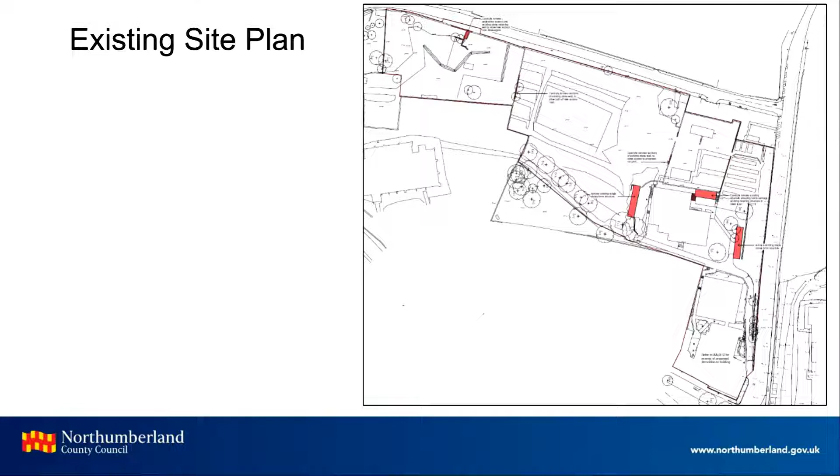To the east of this site is the castle, just to give members some orientation who perhaps aren't familiar with Alnwick itself.

The proposed site plan - important to note, this has already been approved under those previous references I mentioned. So the original permission to which this application relates is for the conversion of numbers 2 to 8 Bailiffgate to form 14 hotel suites/apartments, including a new restaurant and bar area.

It is proposed that this will be connected by a glazed link to a new build hotel block extension to the rear, providing a further 33 hotel rooms. This would equate to 47 in total.

The original permission stated that the existing windows would be retained, and this application seeks to vary this requirement to allow a full replacement of the original single glazed windows with double glazed timber frame slimline cylinder glass units. The modern section is proposed to install aluminium framed windows.

The issue here is whether it is appropriate to replace the existing single glazed windows in a Grade 2 star listed property. The window details on the new extension are acceptable.

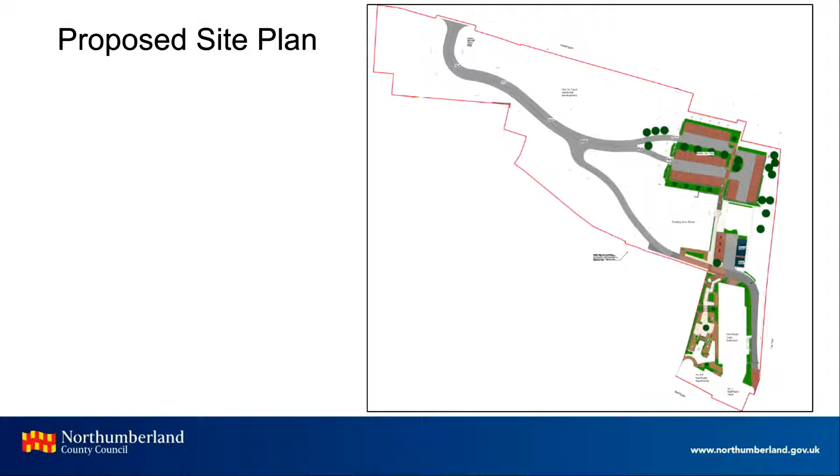So I now have a series of slides. These are the proposed elevations, and members may have seen these before, given they're the same bar the window detailing as previously approved.

So these are the proposed elevations on Bailiffgate. These are the Grade 2 star listed buildings sitting in a terrace. Originally, the applicant stated that the windows would be refurbished and retained. However, we are led to understand, and perhaps anecdotally, that some of the windows are suffering from rot. This does not demonstrate they're incapable of repair.

These doors you can see along the front there, the doors for each building, to be stripped and repaired. The windows you can see would be replaced with conservation-style double glazing. The applicant is proposing cylinder glass. These windows are thought to be the original windows which used crown glass.

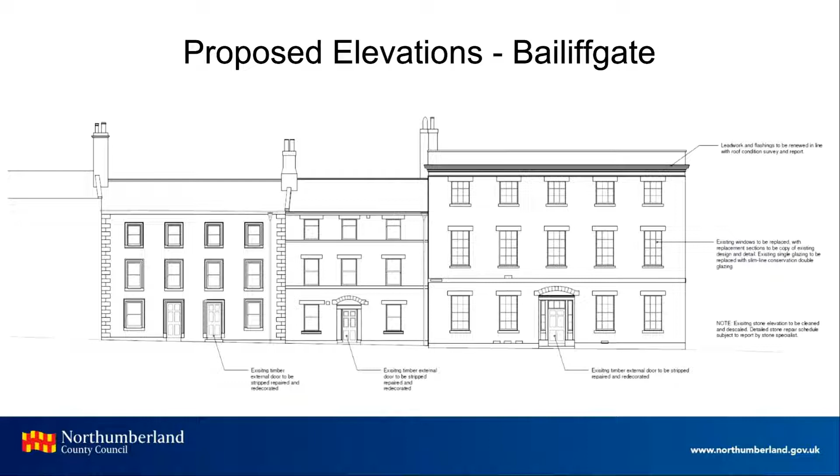So this shows the new build modern element. Materials are natural slate and zinc to the roofs with sandstone walls.

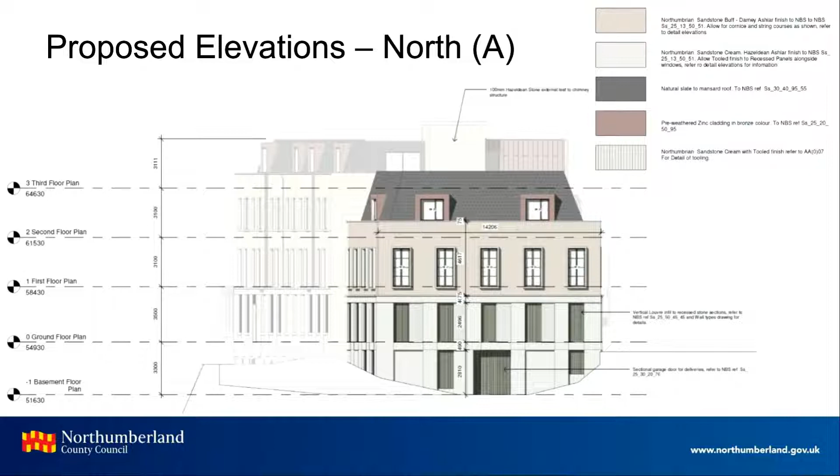This shows the rear of the listed buildings actually. So the greyed out elements, that's the back of the listed buildings. Details include repair and maintenance of stonework and replacement of windows.

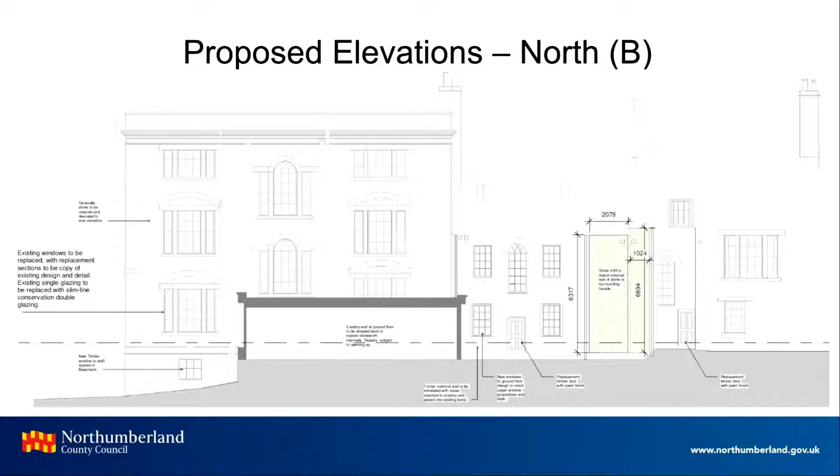This is to the east. As you would, to give further orientation, this would be standing on the pend. You can see the site, the levels slope down, the dark grey at the bottom of the screen slopes down. So you're standing on the pend and the castle would be to your rear. Again, you can see that the existing listed element, the building on the left, those windows would be replaced.

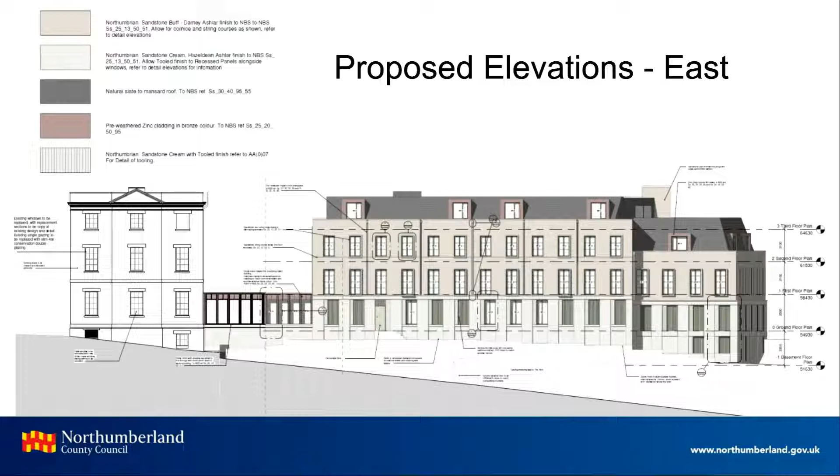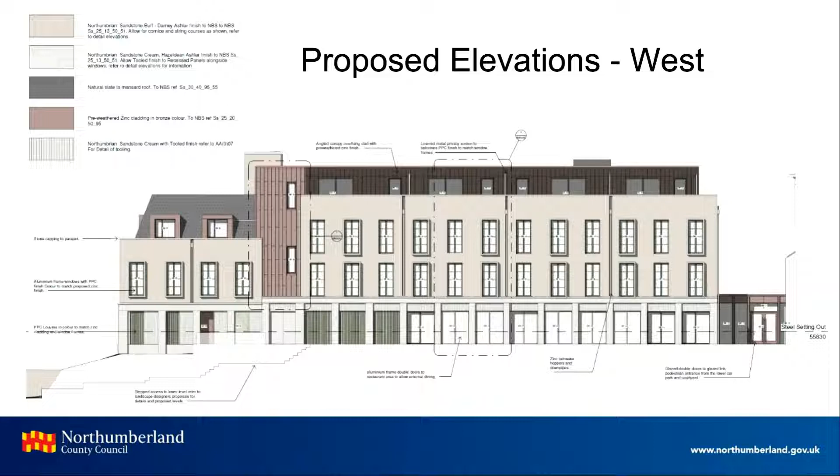In the first instance, applicants should demonstrate that the existing windows are beyond reasonable repair. Only thereafter can the planning authority proceed to consider replacement units.

The Council's Building Conservation team has commented that the proposals have the potential for less than substantial harm, as per the wording of the NPPF.

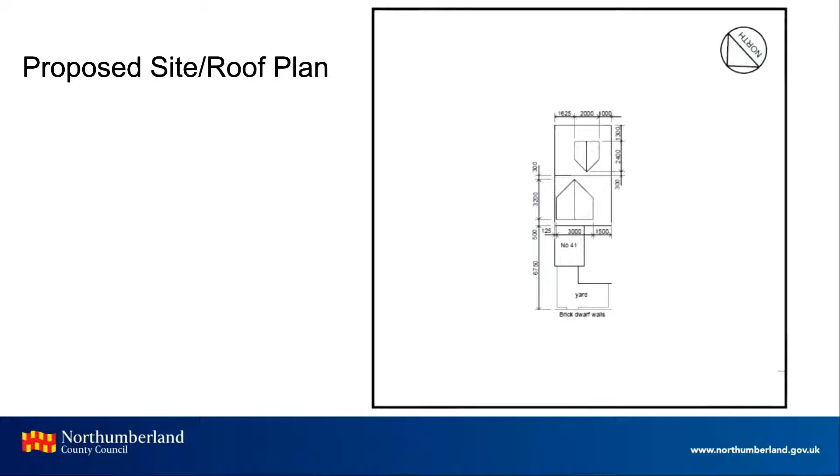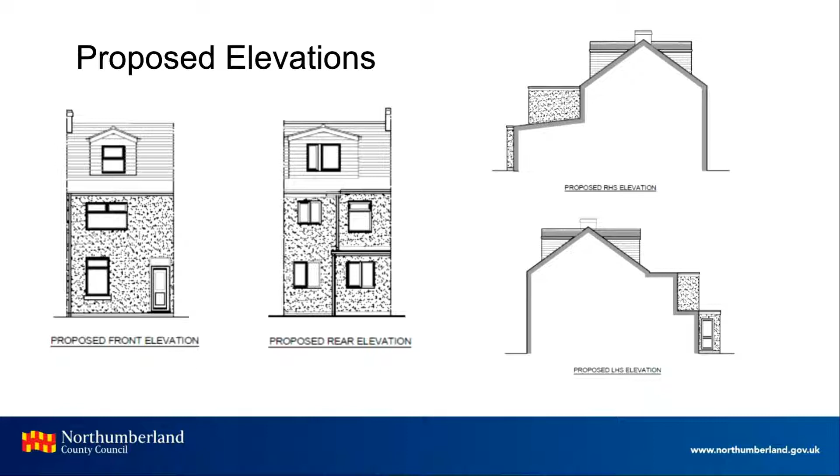The front dormer is smaller in nature, and whilst this type of dormer is not evident throughout the immediate area, there are examples of this dormer style within the conservation area. Here's the smaller proposed front dormer on the left, and on the right, the proposed rear elevation.

Mr Chairman, two objections have been raised regarding car parking and the impact on the character and appearance of the dwelling. The officer has assessed these issues and considers there will be no direct impact on car parking, and the impact on the host dwelling is acceptable in planning terms, certainly in scale, design and finish. The recommendation is for approval, subject to conditions set out in the report.

Thank you. We have no speakers from the public, so we'll move straight on to questions to the officers from members. Do we have any questions for the officers?

Councillor Watson: Just to clarify, that street, George Street, has no dormers at the moment, has it? I know the street, I know it hasn't, and your photograph shows it hasn't as well. I just wanted to point that out. And I'll say the rest later.

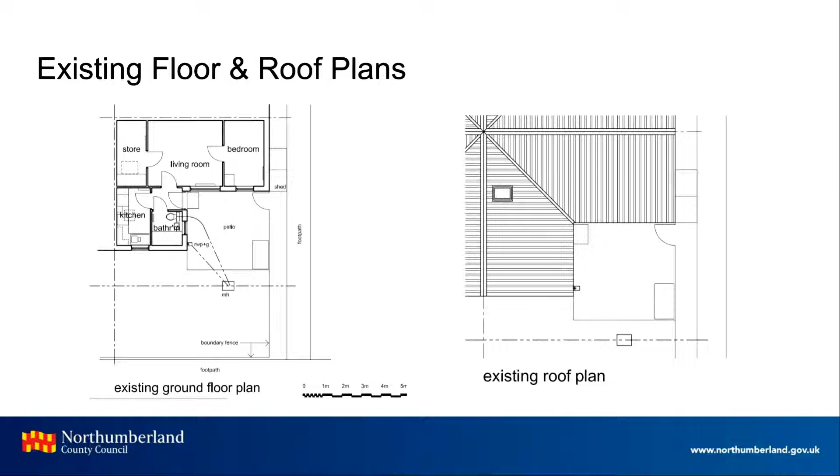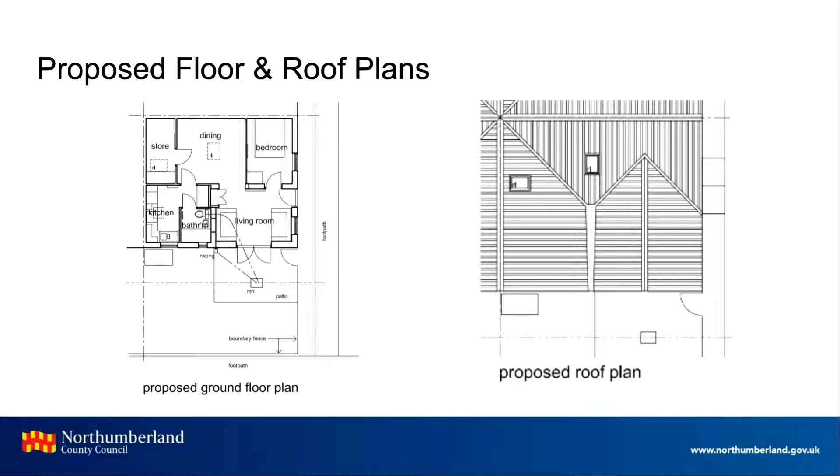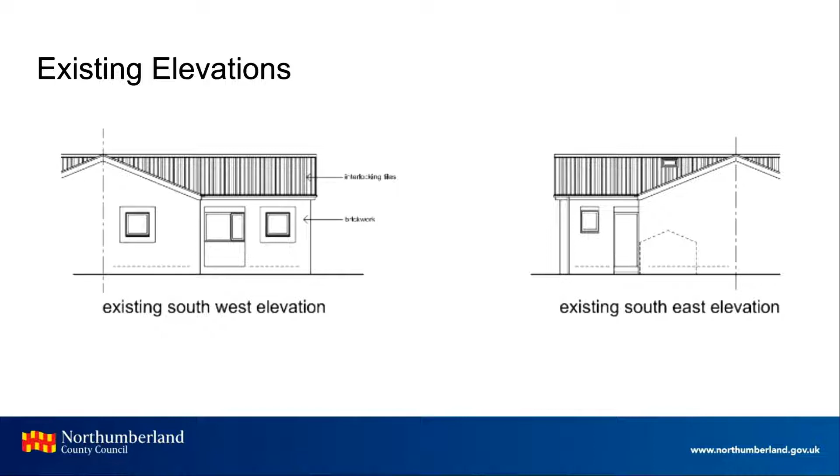The drawings show in plan form the current arrangement of a broadly L-shaped dwelling. The proposed drawings show in plan form the intention to infill that L shape, relocate the living room, and create a dining room for the dwelling. The existing and proposed elevations now show in elevation form the look of the building before and after development, and the proposed elevations show that the infill's external finish will be finished in brick.

The slide shows the existing external finish, set out in brick, and the additional doors are intended.

Mr. Chairman, the Parish Council have objected to the proposal due to concerns on car parking and local context, and the AONB partnership consider the extension too large.

Following officer assessment, it is considered that as a modest extension with no additional bedrooms proposed, there will be no increased parking impact or need over the existing arrangements. Set within a residential street, the modest nature of the proposal will not prove to be too large, with ample external amenity space remaining.

The dwelling will remain in general conformity with its surroundings without adversely impacting local landscapes, and will not have an adverse impact on the wider AONB because it is already set within that residential line, within a residential development. Mr Chairman, this development remains sustainable development in a sustainable location, and the recommendation is that consent be granted subject to conditions set out in the report.

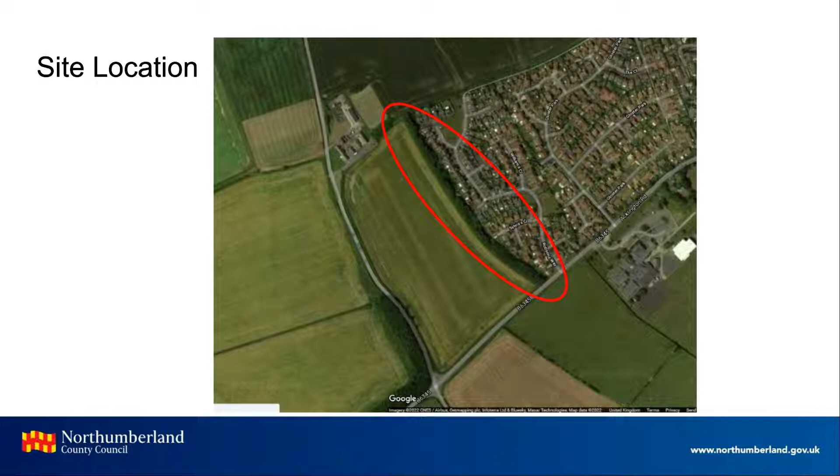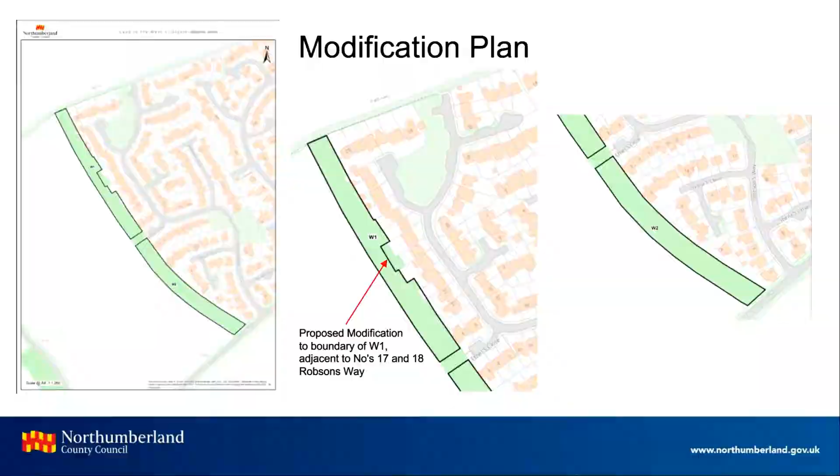There have been 2 objections received within the relevant time frame, raising concerns set out in the report. On balance, the LPA consider that due to tree size, visibility within the public realm, amenity value, future longevity, and the perceived threat to the woodland, because a number of people wish to buy that land and clear it as has already been done for some garden land, the trees are of sufficient value to create a TPO. But I'd point out the option for individuals to buy that land still exists, although future maintenance may require further consent if the TPO is confirmed today.